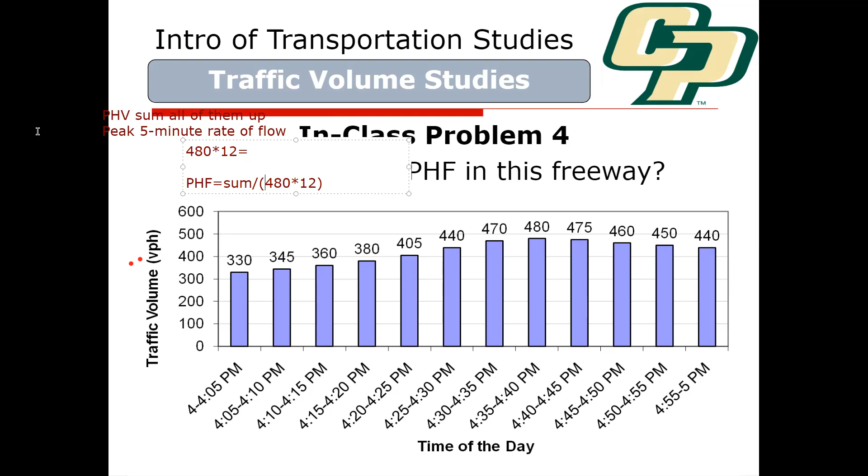So what we can do to answer that question is look at a homework problem and see what we're dealing with here. I think that problem does have that issue, so let's go back and look at problem set 1.

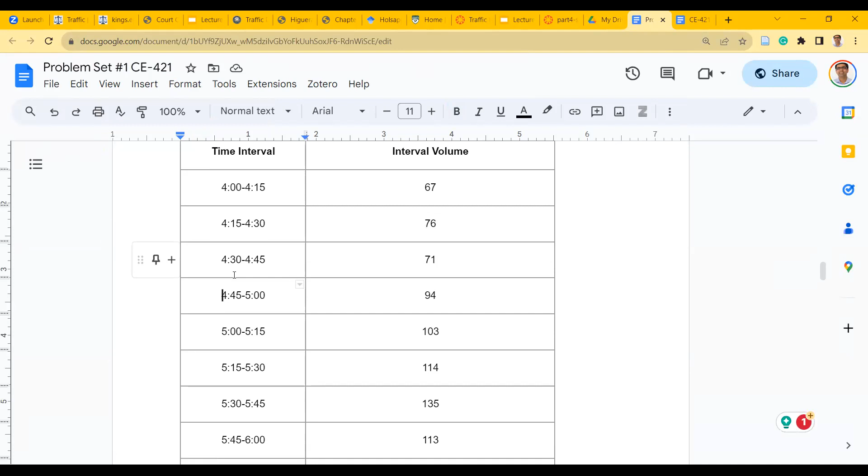Okay, let's look at this one. So your question is, how do we approach this? What I'll do for this problem is add these 4, note what that number turns out to be, then drop this 67 and add this 103. So next I'll sum these 4.

You can do it more easily in Excel, for example, by doing a rolling sum—start the sum here and drag down that formula, and it will automatically do that for you. Then I'll drop this 76 and add that 114. Every time I'll just be adding 4 consecutive observations, and whichever gives me the maximum, that will be my peak hour.

When deriving the peak hour factor, in this example I'm pretty sure this 4 would be the peak hour, from 5 to 6 o'clock. But it doesn't always have to be at full hours—it could be 4:45 to 5:45 as well. It could be any time period, starting any time, but it just has to be 4 consecutive observations.

Now for peak hour factor, I'll rely on this 135 because that's the highest number within the 15-minute period, within the peak hour period—that's the peak 15-minute period. So I'll rely on this number right here.

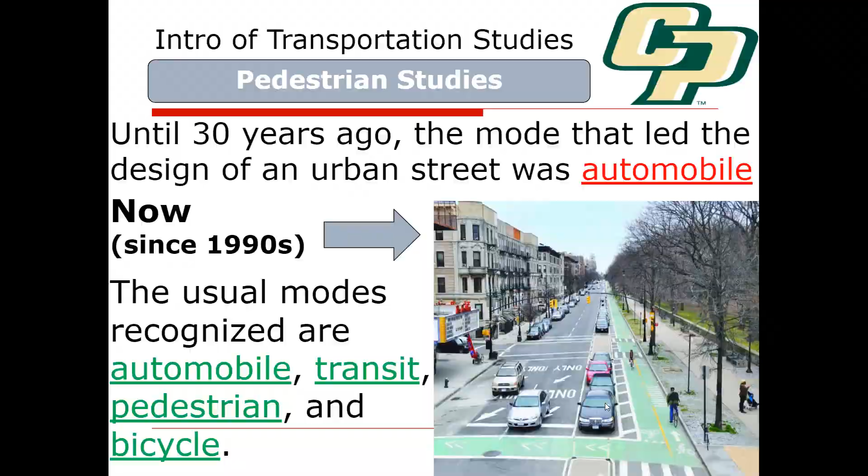But to answer your question, short answer is yes, there are studies that have documented induced demand for bicyclists. I think bicyclist demands are up, and there is a very, very interesting study I noticed very recently that came out, and they looked at which are the cities that have seen the most increase in bicyclist demand, like how many trips are being made by bicyclists.

I think they used some online database like StreetLight Data, and what they found was Bakersfield, of all places in the state, was number 3 in the country among the top 100 cities by population, metro areas in the country. Bakersfield area was number 3, and they saw a 70% increase from 2019 to 2022 in bicycle use, which is great, right?

And they are doing some of that stuff. On the flip side, Fresno was 100th among those 100 metropolitan areas, with a 10% decrease in the number of people biking. Now, I haven't looked at the data carefully, but I'm aware that Bakersfield is doing a lot in terms of their bicycle infrastructure. And I know Fresno isn't necessarily—I haven't heard about Fresno.

So my thinking is that maybe they're doing okay, maybe doing some things well and some not so great. I haven't dwelt into the data to see if there's a quirk there. But that gives me an indication that if you build infrastructure, which Bakersfield is doing to a large extent—that MPO is putting a lot of money into it—you see increases. To me, the way I know Fresno and Bakersfield, if you just look at raw factors like weather, population, demographics, they should be pretty comparable. I can't think of any reason those two places would be significantly different.

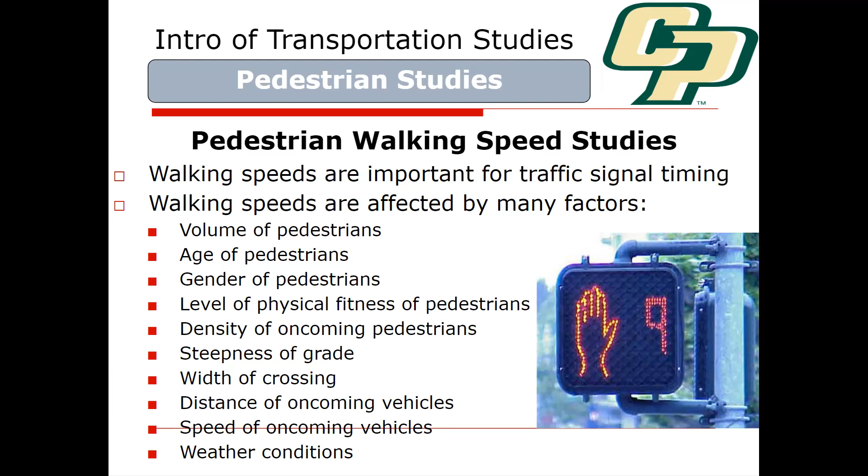They're affected by so many factors: volume of pedestrians - if it's a crowded area you'll have slow movement, age, gender, physical fitness, density of oncoming pedestrians, what's happening on the other side of the road, if there's a grade involved, width of crossing, distance of oncoming vehicle, speed of oncoming vehicle, weather conditions. If you have inclement weather, pedestrians won't be walking as slow - they're walking with an umbrella or something. So a lot of different factors affect it.

But we measure the speed pretty much in the same way, typically based on distances. We try to measure with a stopwatch some randomly selected pedestrians and establish the data. Now, if you try to get this information, it would be pretty hard to get just by observing pedestrians, because you won't know their age.

So this data is way more intrusive, the result of a much more detailed study, versus a lot of time you'd just be interested in what's happening at an intersection. So you just pick out random pedestrians to get a sense of it. The way you pick out random pedestrians is not picking the fast movers or the slow movers - you just say, I'm going to pick every fifth pedestrian that crosses this road. And you have to be careful about that, because the faster moving pedestrians would be reaching that point pretty quickly.

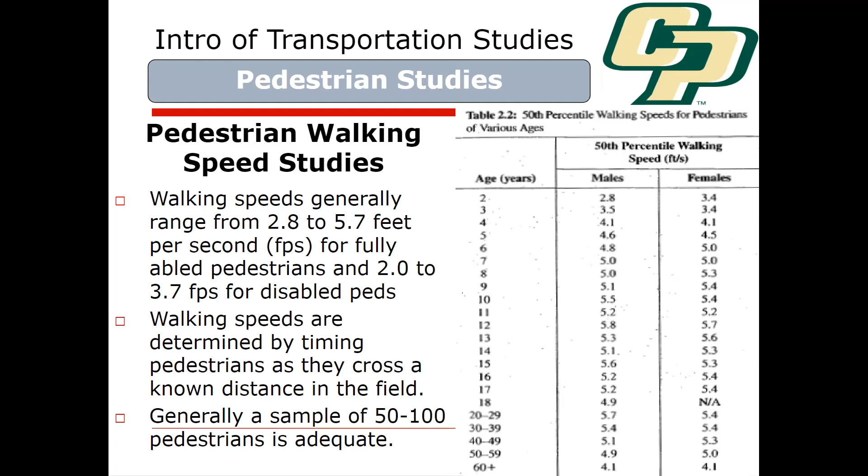Pedestrian walking speed is 3 to 6 feet per second. If you're running, you can get about 10 feet per second. For the MUTCD, you use the 15th percentile because you're looking at the slowest walking pedestrians, so you design the crosswalk much more conservatively.

This 15th percentile, 3.5 feet per second study comes into play when you're talking about a pedestrian walk signal, the walk signal versus the flashing hand signal. That flashing hand signal remains in place and tells you don't start now. That flashing hand signal timing is determined by the 3.5 feet per second speed.

You divide the number based on the width of the sidewalk by 3.5, or width of the crosswalk. So if you're crossing a 30 feet crosswalk from one side to the other, 30 divided by 3.5 would be about 8 seconds. That will be the indicator flashing for flashing don't walk, so that you don't start at that time, and then you add some safety time to it, like an all red interval.

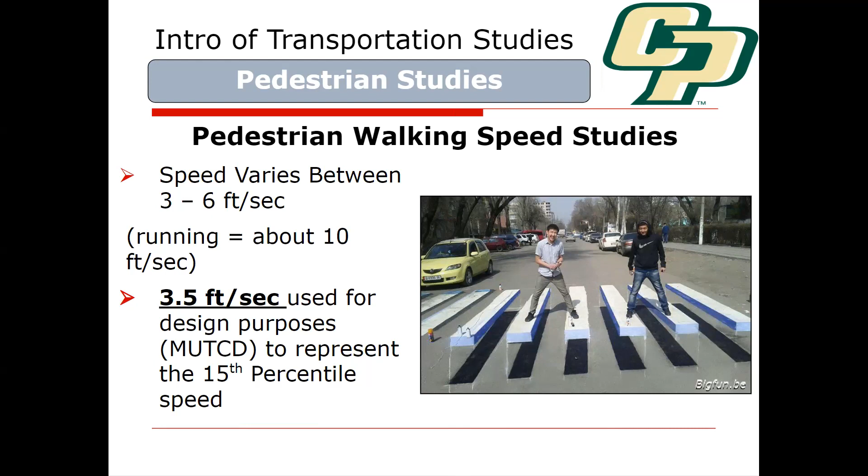We'll talk about that later in the class when we actually do the signal timing stuff, but it's something to keep in mind where this data is typically used.

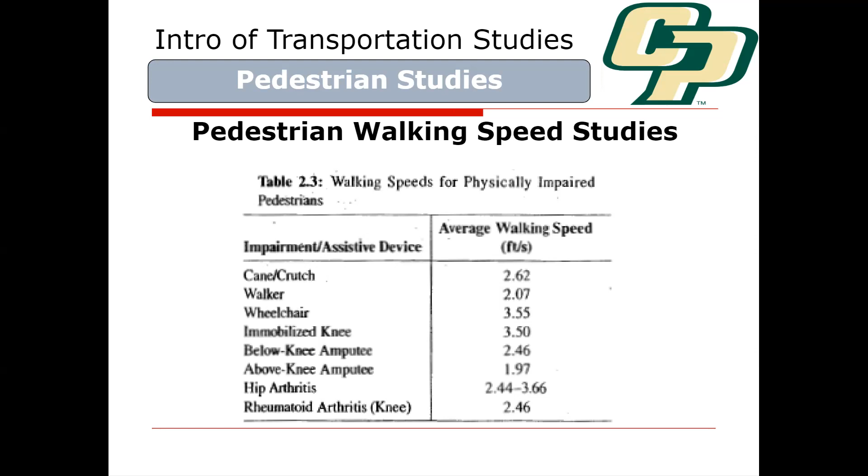Walking speed for physically impaired pedestrians is something you might want to use near a hospital, for example, where a lower average walking speed number would be used. This is data that requires observation, and if you're deriving an average in each category, you need enough data samples. This is a more detailed study, sometimes needed for an old age home, a hospital, or similar locations when designing a sidewalk.

Pedestrian warning signs are used in advance of all marked crosswalks with pedestrian crossing assemblies, pedestrians ahead, next 500 feet, next half a mile.

I wonder, does anybody recall, do we have those on Santa Rosa, when you're approaching Santa Rosa from Cuesta College? I wonder if there's some kind of indicator, but that's one area where there is some concern.

Yes, there is a signal ahead sign, obviously that's there when you're approaching from the fire station. But those areas with pedestrians are a significant concern, and that's a Caltrans controlled road, so that's another thing.

Anytime we have pedestrians interacting with a Caltrans controlled road, that's where we see the most dangerous conditions for pedestrians, because Caltrans doesn't want to slow down too many things, since the road north of Highland Drive is more of a rural area and needs throughput.

But once you come on this side, there are so many pedestrians and a shopping area that becomes the shortest path to Cal Poly, and you must have seen people crossing, and you might have crossed yourself. You can blame the people to an extent, but if there's a shortest straight line path, it's very hard for engineers to dissuade people from using it. So maybe that's where we need forgiving areas and figuring out the best way of providing infrastructure.

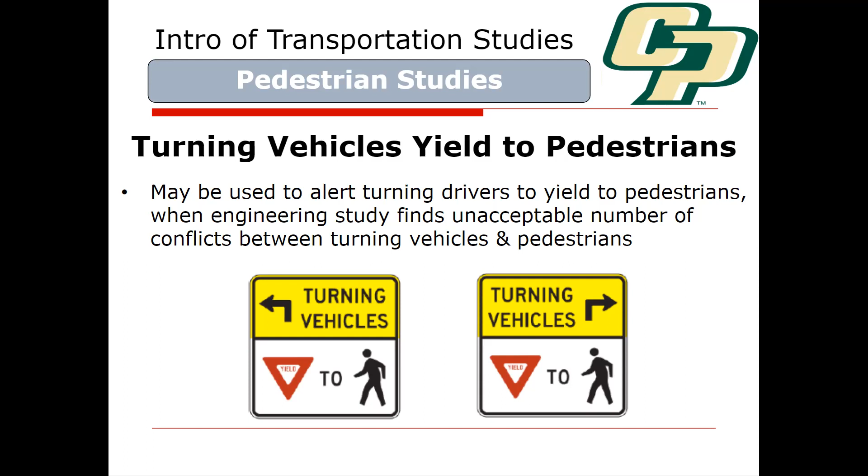And then there's this question of no turn on red, or no right turn on red. So that's another thing we're looking at right now: when should we provide a turning vehicle to pedestrian sign. More than 100 vehicles per hour turning across a crosswalk during peak hour, and more than 50 pedestrians per hour using the crosswalk during the same time.

One might argue—and this is an 'or,' so you could use either, which is good, I guess—but one could argue that this is reactive in a lot of ways. You're telling that if you see 50 pedestrians crossing, then you provide that signage. But to me, signage is such a low cost thing, and again you don't want to clutter locations, but maybe you want more pedestrians in that area. Maybe there are locations where more pedestrians would have been there had you provided more signage. So sometimes you have to look beyond these guidelines to provide infrastructure, to provide signage for more active travel to take place than it does.

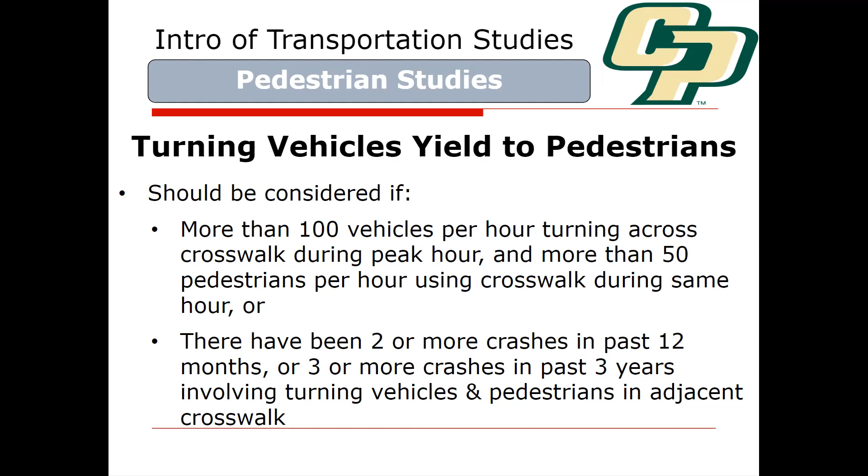But this is some of our current standards that exist, and again they're based on collisions: 2 or more crashes in past 12 months, or 3 or more crashes in past 3 years, involving pedestrians and vehicles in adjacent crosswalk. So something to think about. And then once you install it on one leg of the intersection, you can potentially install on all legs of the intersection to make sure that infrastructure, that signage, is provided.

Also, there are studies showing that some of the signage DOTs and transportation management professionals put out, which are sort of cute in nature, doesn't work very well actually—they don't do what they're supposed to do. For example, there was a particular stretch of highway in Texas where they started posting cute signs about 'click it or ticket'—not exactly that, but some funny, creative signs. But when they actually looked at the data on collisions, the collisions went up downstream of those signs, because those signs maybe distracted drivers in some ways. They controlled for a lot of things—they didn't just do a naive before-and-after study, they looked at similar locations without the signage and analyzed the data in a sophisticated way. So you have to be careful about the messaging you're providing to road users, because even messages DOTs put out aren't always very effective from a safety perspective.

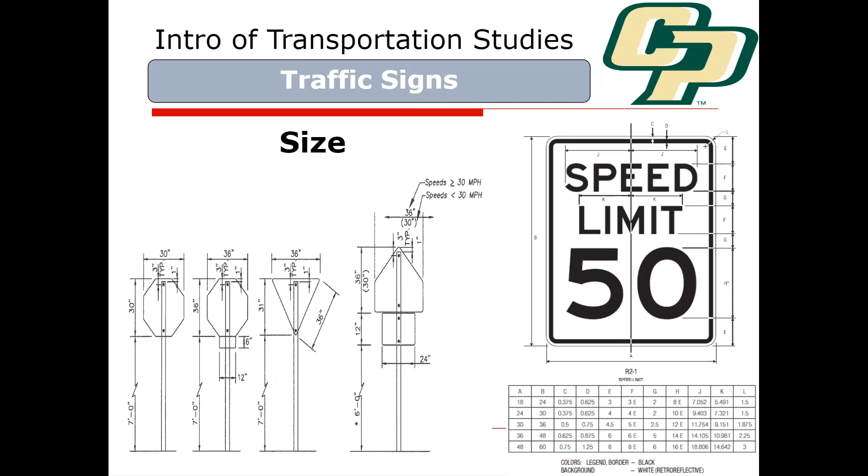Same thing applies for pavement marking. When you're reading text on a pavement sign, it has to go in a certain way - you should be able to read it moving forward. So there has to be a certain order when providing pavement signs. The same rules apply to pavement marking, and they're based on how the human mind reacts to certain situations.

Is it not the US though? This should be US, I think. Don't you think it's on the right? I think it's on the right - traffic is moving on the right side, right? They're in the US. What makes you think it's not US? Oh, the curb is down. I couldn't see that - oh, the curb, like where? The yellow.

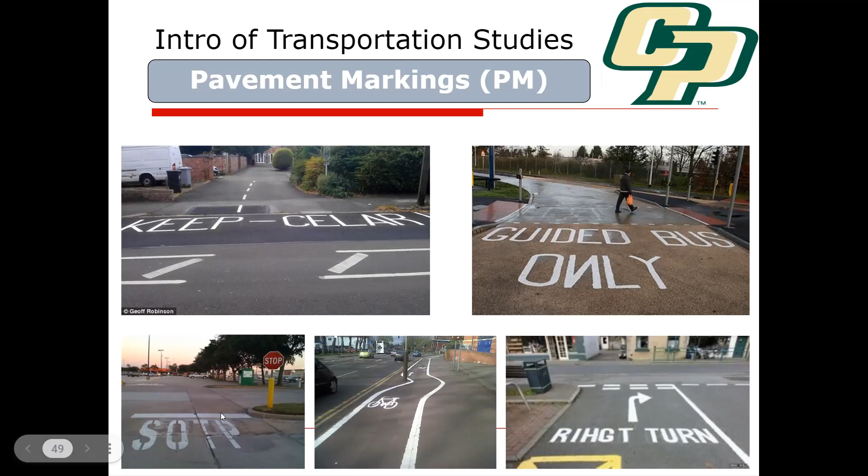If you look at the pavement marking, for example, this one right here - I mean obviously this is a wrong one - but the stop sign, the stop line, is actually a regulatory sign that you're supposed to obey.

And then you can see guidance, like whether which route you're taking from that lane - so it's 15 north, whatever it is. And then it could be used for warnings as well, sometimes chevrons and things like that. So the pavement markings could be used for any of these three purposes: regulations, guidance, and warning. Those are three good categories. Anytime you're looking at MUTCD or any kind of guidance, they could fall within these three categories.

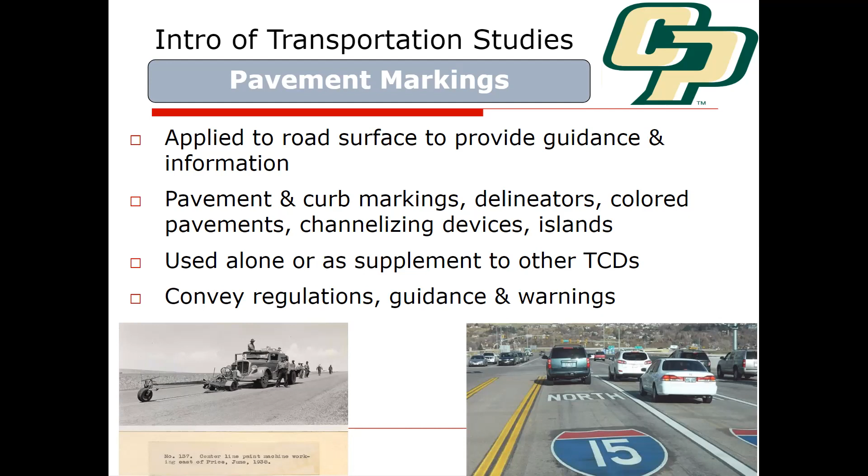The pavement marking must be visible in all conditions, and that's not always the case, which could sometimes lead to problems. Retroreflective on freeways, so that when the light comes in, your car's headlights reflect back - for night visibility, unless you have roadway lighting, which we don't a lot of times. So that has to be there, these pavement markings have to be visible.

Part of the reason why they recommend you stop and not drive is that sometimes inclement weather might make these pavement markings completely invisible, and that's a problem sometimes, depending on conditions. So that's one big reason why they advise you not to drive, because sometimes you can't see where the lane ends or starts.

These pavement markings also have specifications on sizes. Don't worry about the specific sizes, but different DOTs have different specifications, and you have to follow those specifications and make sure they fit certain requirements. Again, I'm not worried about specific details, but you have to know and consult MUTCD or the California MUTCD when you decide to have pavement markings there.

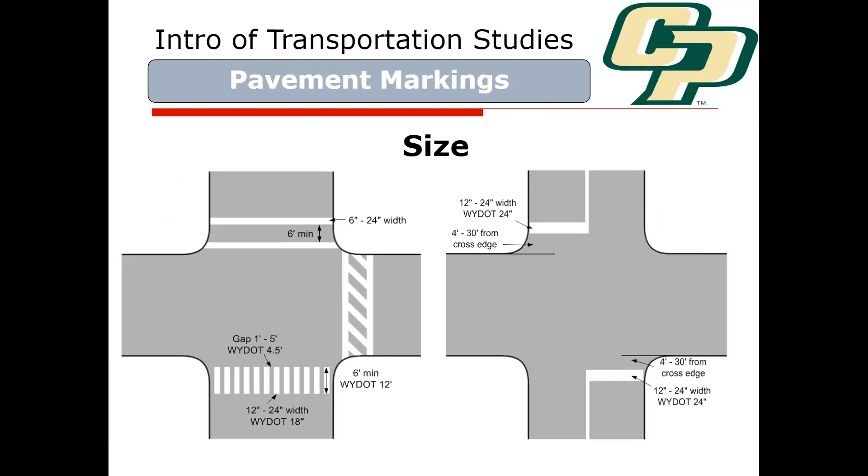So here was the question, right? This is all about the freeways, so I'm gonna talk about AB 43, the Assembly Bill 43, which established that communities, if they think this is their central business district, have more flexibility in setting the speed limit to be lower than the 85th percentile and still be able to enforce that limit.

Before, the problem was that if your speed limit was lower than the 85th percentile speed limit, as a community you could not ask law enforcement to issue tickets to people going above the speed limit, because your speed survey, which was required by law to have on file, said your 85th percentile speed is higher than the speed limit. So you could not enforce that speed limit. In fact, you were forced to raise the speed limit to match that number.

Now AB 43 gives more communities this flexibility to establish a lower speed limit. If you're talking about a central business district and you expect pedestrians and vulnerable road users in that location, now you're allowed to do that.

Now, the challenge, I think, is that enforcement is a very expensive thing, right? Enforcing the laws with a cop is very, very expensive.

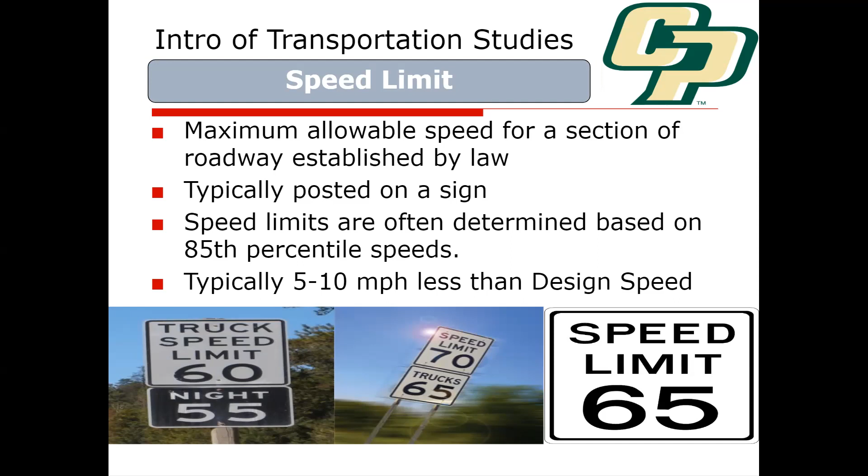You don't necessarily have to do that on the freeways. I'm a big fan of lower speed limits, but maybe that has to be done on roads like Santa Rosa, rather than trying to lower speed limits on freeways necessarily. So those are the nuanced discussions we have to have with regard to speed limits.

For vulnerable road users, the question is what happens because electric vehicles weigh more, and in general our vehicles have increased in weight. Even ICE engine vehicles have increased in weight quite a bit. So I think we see some of that in the fatality outcomes, specifically for vulnerable road users. I think those are going to be pretty bad outcomes.

Automobile occupants probably are going to be okay, because we're improving occupant safety quite a bit, since car companies are very sensitive to the needs of their customers -- those are the people buying the cars -- so they keep them safe. Even if weight increases, there might be a marginal increase in the fatality rate for automobile occupants, but that would be dwarfed by the increase in fatality for vulnerable road users outside the vehicle's protection area. So that's definitely a big concern.

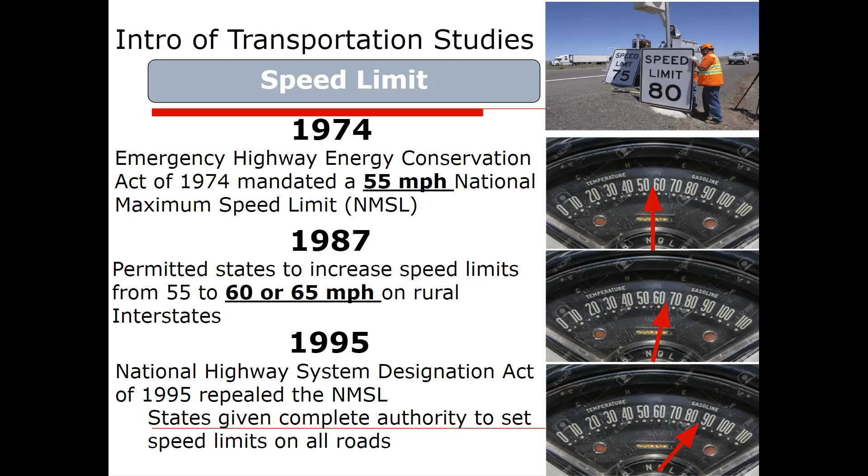That could be, and they should be monitoring fatality rates and all of that, and we should always look out for if a safety problem is presenting itself. But I think our bigger problem in terms of safety is on those roads, especially state roads being street and road combined, a term we use sometimes, like what's happening at Santa Rosa, between Foothill and Highland, for example. You can extend that idea from Highland all the way up to near downtown, like Mill Street, where there's a lot of roadway car traffic that interacts with pedestrian and bicyclist traffic. So that's why I think speed limit is a bigger concern there.